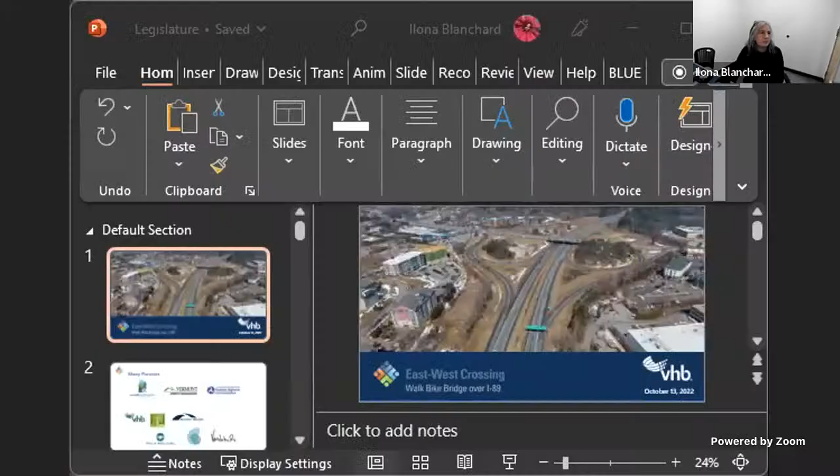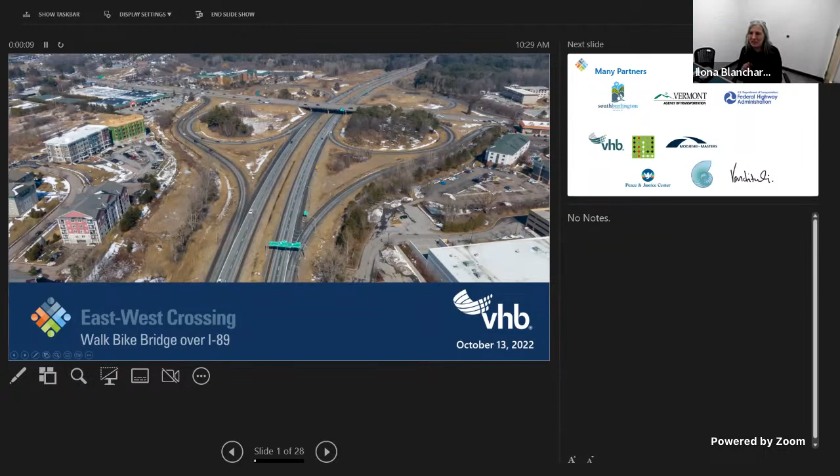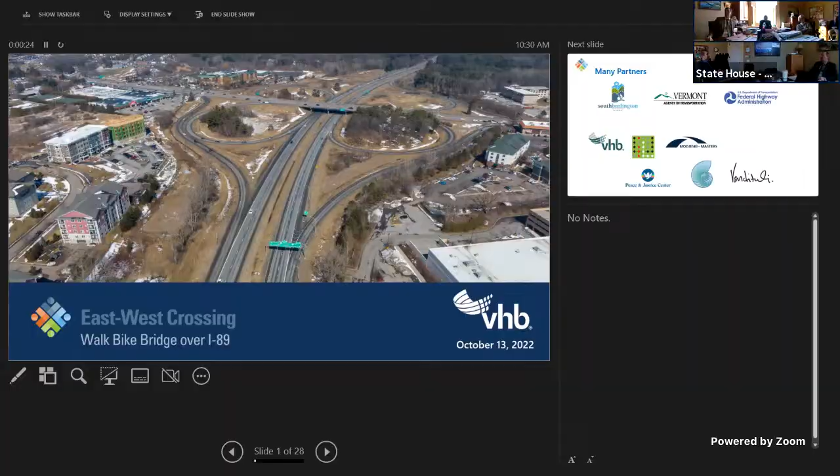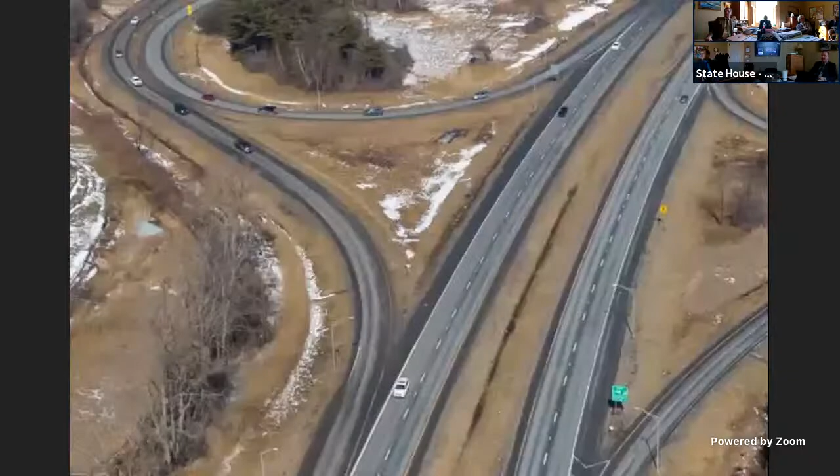Bridge is yet to be named, so we get to choose a name today on this bridge. Right, great. Are you able to see my presentation now? Yes, okay terrific. Is it the actual presentation screen as opposed to the background? It's not the full, we can see your notes and your next slide. You might want to share your other screen. Okay. Keep the volume on the Zoom device, mic. Here we are, yeah, there we go. That's good, okay good, all right great.

So this overview shows exit 14 and the south side of exit 14, which is where the east-west crossing walk bike bridge will be located.

This is a project that has been on our official map since the 90s, and we had tried for many years to receive federal funding. It's also in our tax increment financing district, and really the TIF district was the trigger that allowed us to look for federal funding for this project. It is a huge project, and even the match required for federal funds is millions and millions of dollars, so we really needed the TIF district to move it forward.

It has been studied many times. We went through several scoping studies in 2018 and 2019 with CCRPC in order to understand where the alignment would be and what form the overall project would take to better move pedestrians and bicycles through this corridor.

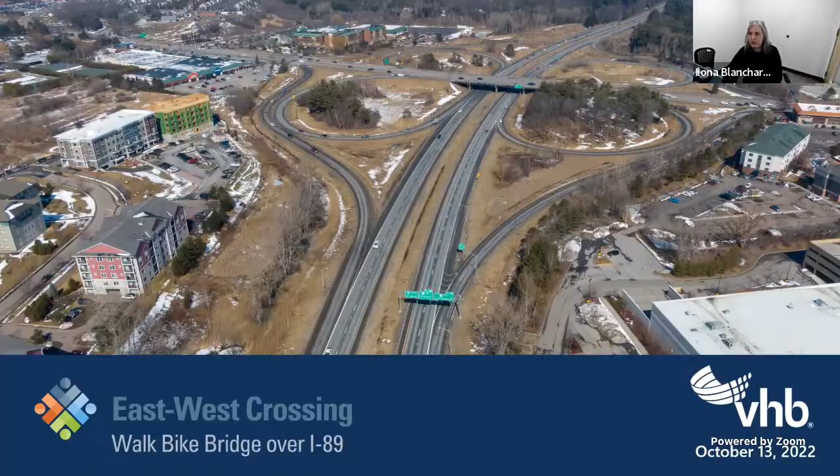I want to tell you a little bit about our project team. We are working very closely with the State Agency of Transportation. They have a separate pot of money to assist municipalities, and they're really helping us through the federal process. We have two members from the Municipal Assistance Bureau, Andy DeForge and Pete Pochop, who are attending all team meetings and ensuring this project stays on track, because we were successful in receiving federal funding through a RAISE grant from the U.S.

Department of Transportation. It's a grant that the Secretary awards, and the sub-administrator is the Federal Highway Administration. So the local Vermont office is also part of administering the grant and is on the team helping us through this process. Because it has a very tight timeline, we actually have to have all of our federal funds obligated by next year, which is extremely short in federal project timelines.

So the Agency of Transportation, as both a sister agency, reviewer, and landowner in this project, has really stepped up to be a great partner on this project. And then we have subcontracted with VHB and a large team of sub-consultants to carry out the design portion of the project.

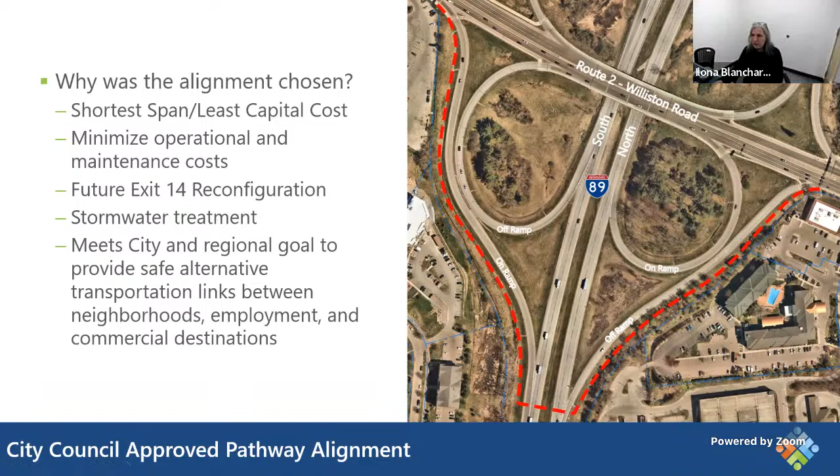And I have a bigger page, so this is a bigger view of it. The Staples Plaza is on the left side of your screen, and the CVS, Comfort Inn, Homewood Suites are on the right side, with the University Mall just to the south, on the southeast side.

So the on-ramp is towards Montpelier, and the off-ramp is from Montpelier. It'll just be a walkway for pedestrians and bicyclists. Because of that, it has to be at a very low grade, so it's at about a maximum of 4.5%.

Is that where our state police barracks is going to be up here? No, that's not Williston, that's South Burlington. So you've got the University Mall right here, and that's the old Sheraton, and this is Staples. So it's the University Mall, and UVM's right here, Gutterson's right here, the athletic campus.

There's a large population of student housing, and this is all student housing now too. Just getting over to here is really difficult and intimidating - it's like a war zone trying to cross and walk along. This is Quarry Hill, and this is the University Mall.

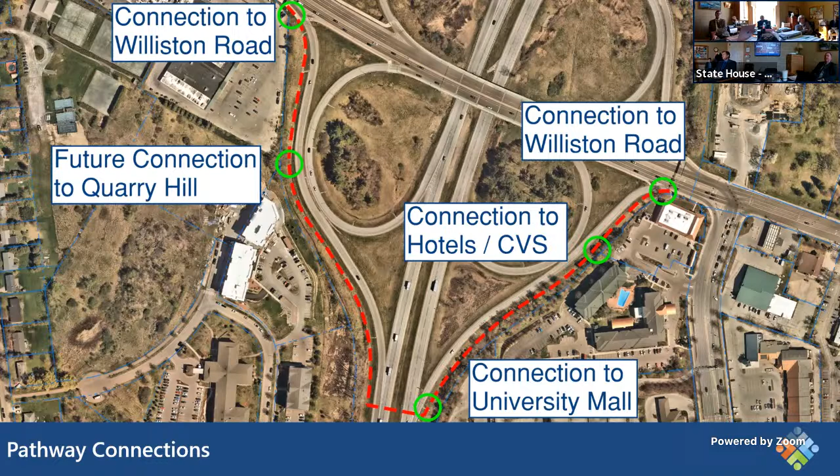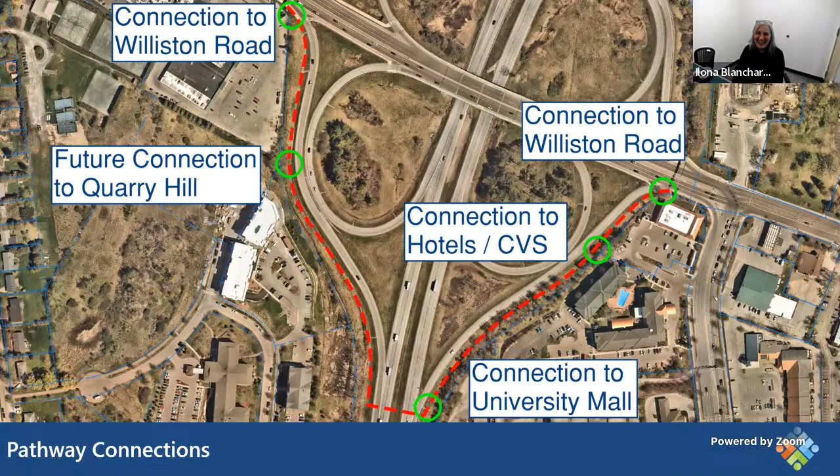Sorry, what was the funding for it? Is it state money, or is this a federal grant directly? I think it's all federal, local money. How much is this, Ilona? What's the funding? Who's supplying? How much? We're getting there. Okay, sorry, yeah, so it's actually that next question.

So the total project budget is $14,550,000. We will most likely be looking for additional funding. We have been going through a value engineering process between when we received our grant and when we completed the concept. We redid our cost estimate, as you would normally do at the concept stage, and things like steel had doubled in price. So there's a lot of flex in pricing at the moment, and we aren't at the opinion of cost level, but we anticipate looking for additional funding as the project progresses. It would be minimal in terms of the overall budget, which is still a big investment, a big project, and a huge change for the region.

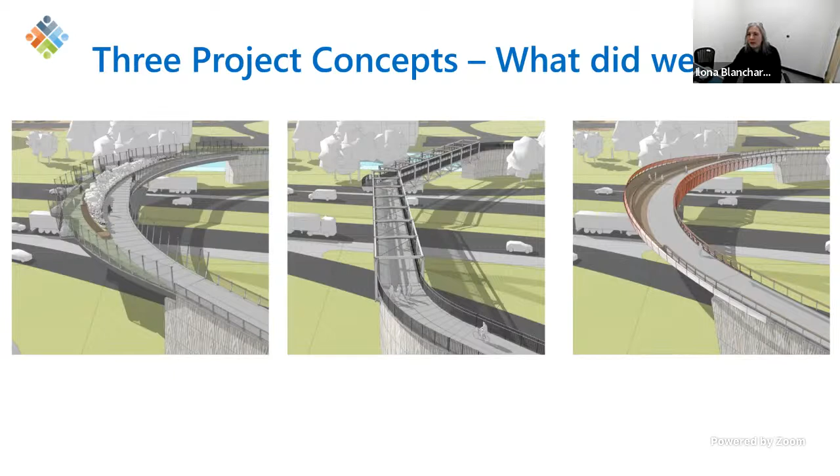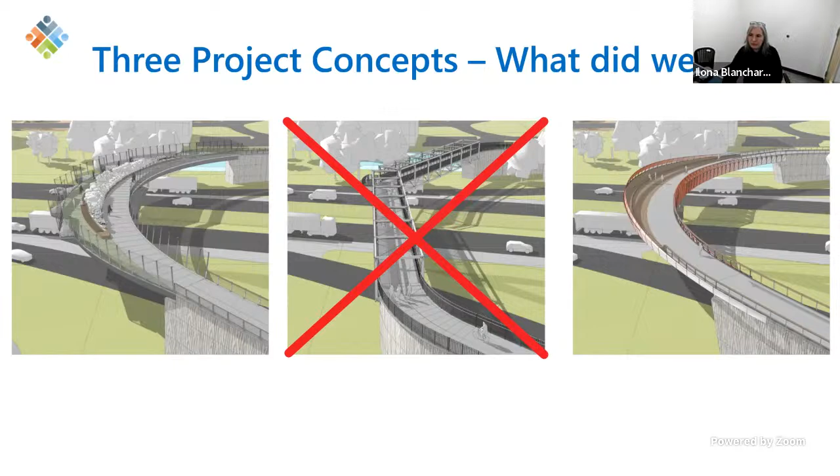These were the 3 concepts that people weighed in on - they're all very different. This being Vermont, people were very attracted to the greenery, and they also recognized that this area can be very windy, so they also liked the walls. A few people really liked the truss style bridge, but not so many, so that one went off the table fast. We ended up with a combination of greenery and a shelter, remembering we're about 30 feet up in the air, and the traffic also creates its own wind, so it can be a very windy location.

Some of the things the community has been pushing for in this project, through the TIF district and through the vision and comprehensive plan for the city, is that this be a bridge that attracts people to use it, but also that it is part of our placemaking for the community and helps establish South Burlington as a distinct community within our region.

And of course, we're very committed to environmental sustainability, and this is part of our downtown development plan.

Okay, so I think all of this does have public art. It's important that it be ADA accessible so that there are places people will be able to sit and rest if they need to. And of course, we have a lot of environmental concerns built into the design process.

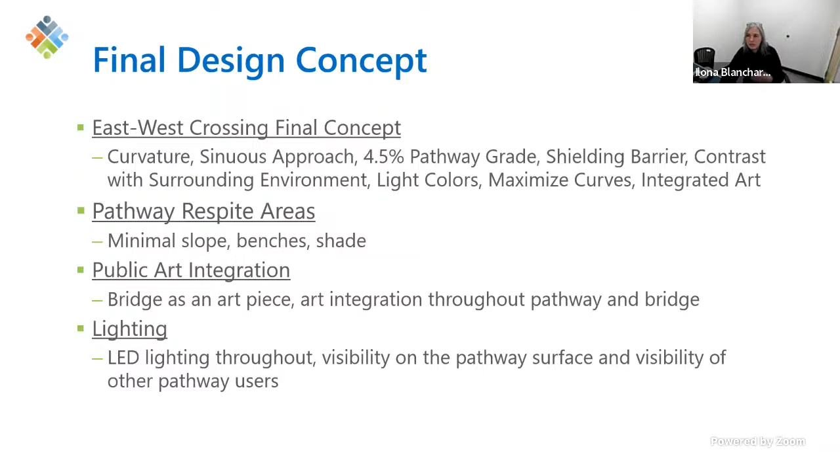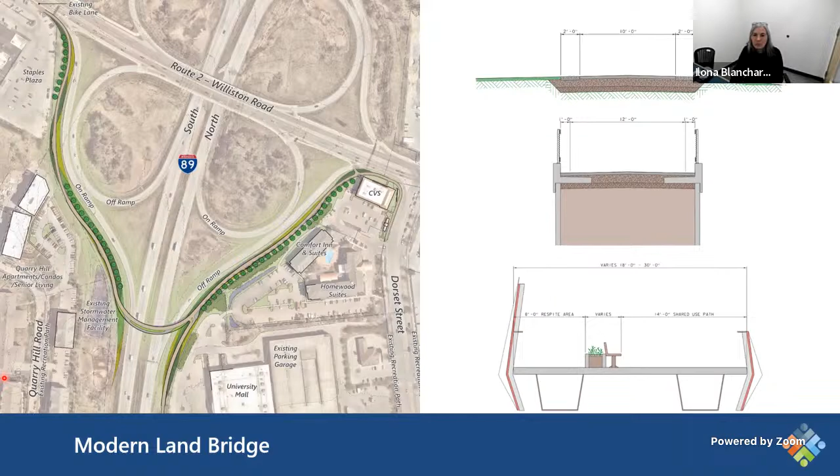So this is the bridge concept. I will say that we are holding to this concept through the value engineering, but we are moving this connection back closer to the trees, and then it would come out right here as opposed to here. This piece alone was $2 million, and the investment was not worth the outcome.

But generally, we are looking for a bridge that is iconic and that people can recognize from the outside, but also so that when people see it they think, oh, maybe I'll walk over there—it's inviting and they want to make that effort and feel comfortable doing it. And also that it's a place people feel comfortable at night as well as during the day, and in the winter as well as in the summer.

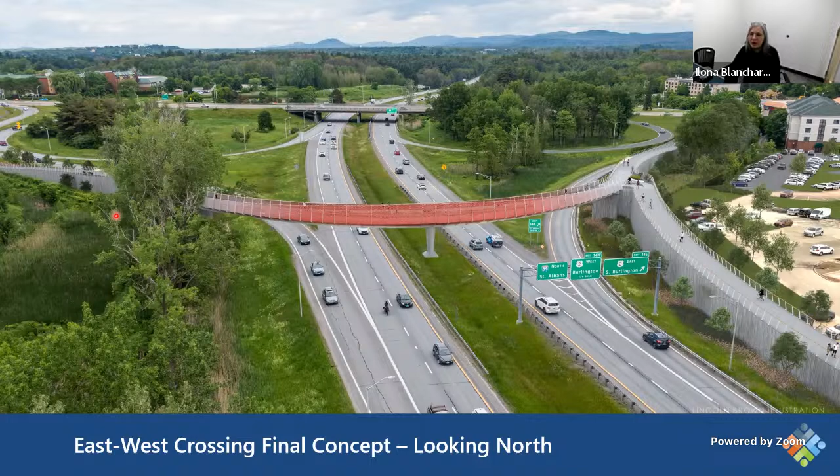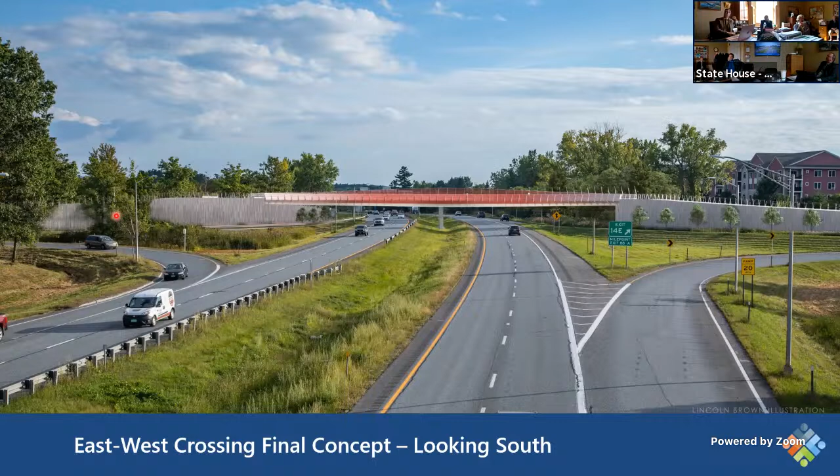Well, it certainly needs to have something - it's reminiscent of the discussion we had around the bridge over Quechee Gorge, which became a very attractive place for suicides. At 30 feet in the air onto a highway with trucks or whatever, so that's going to be important. No, and that has definitely been a big part of our discussion.

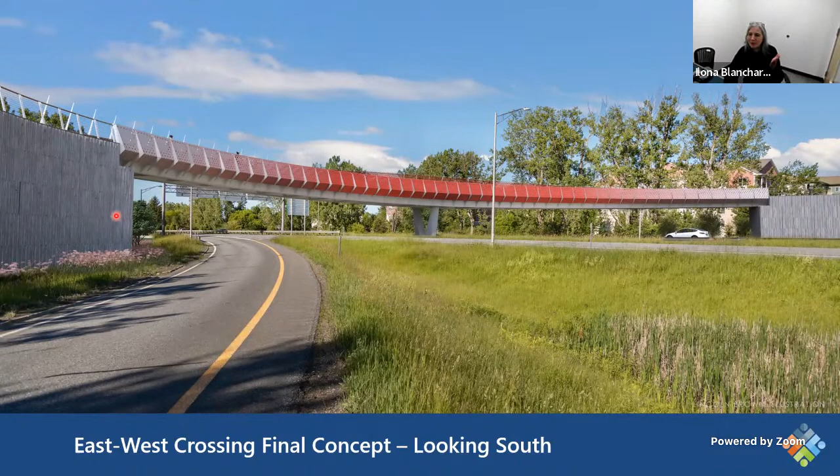Oh, that's good. Yeah, so this is sort of what you would see from the on-ramp, although this is actually the off-ramp.

I'm surprised it's not green and gold. I'd support green and gold, but this is good for the next council, I guess. So the architect for this project was inspired by all the red barns in the winter, which was an interesting observation - just making sure it stood out against whatever the background was.

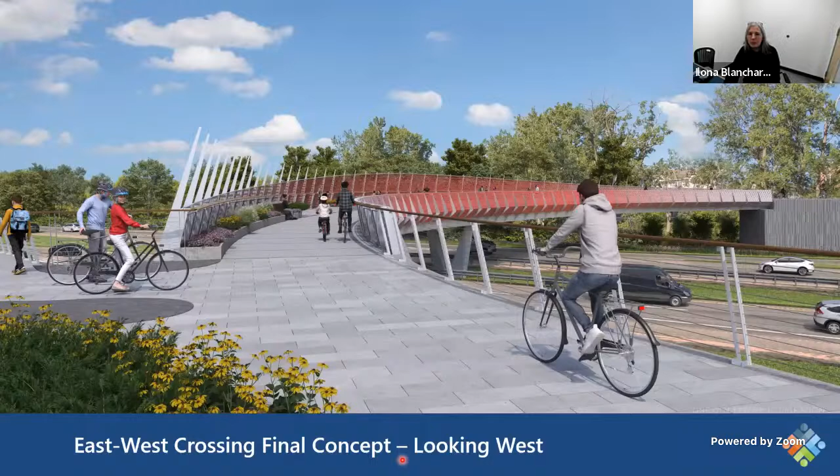So this is a view on the bridge. Right now, the perforations are circles. One of the comments we received from the community was that they wanted to be able to look out without having to look through multiple holes. Since we all have two eyes, we need the holes big enough so that we can look out a single hole comfortably. So that pattern will probably go through some alterations.

The other thing is that through value engineering, we will have greenery, but this concept shows a very wide bridge, so we've made it narrower. The pathway is generally 14 feet, widening to 22 feet on the bridge. This concept shows a 30-foot width, which is really wide - it almost becomes like a plaza on the bridge. But because it was so expensive, we asked the consultants to bring it down as part of our value engineering, so there will still be room for greenery, just not as much of a gathering space.

Look at it. Yeah, so just for perspective, most recreation paths are about 8 to 10 feet - I think the standard is now 10 feet, so if you've been on a newer path, it's 10 feet. We have 14 feet because that gives you some shy area for railings if you're biking, and then it widens a bit more on the bridge as you go around the curve, giving you a place to stop and look out, and also space for landscaping in the summertime.

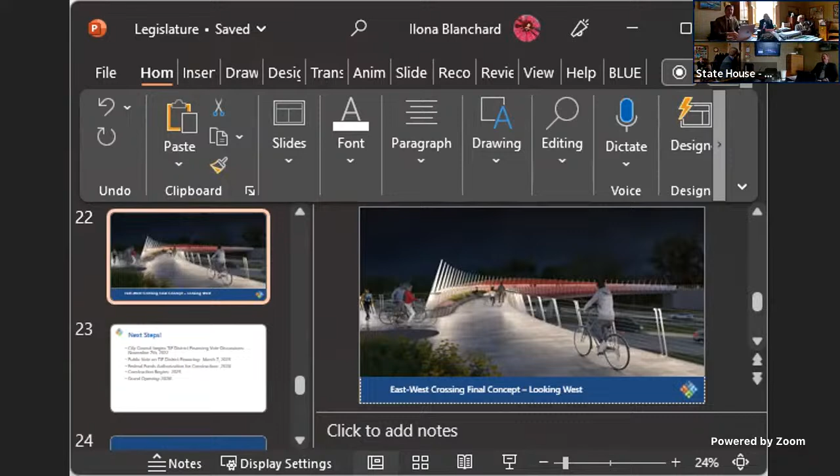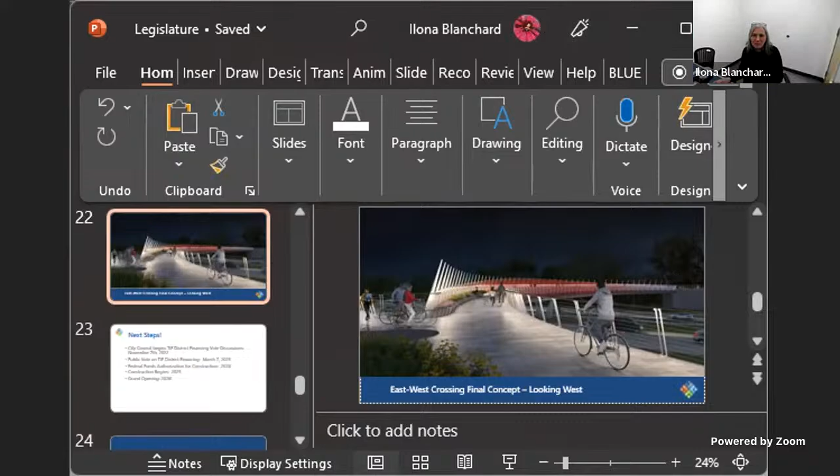So we got a couple minutes here to wait for Amtrak. Yeah, 15 minutes.